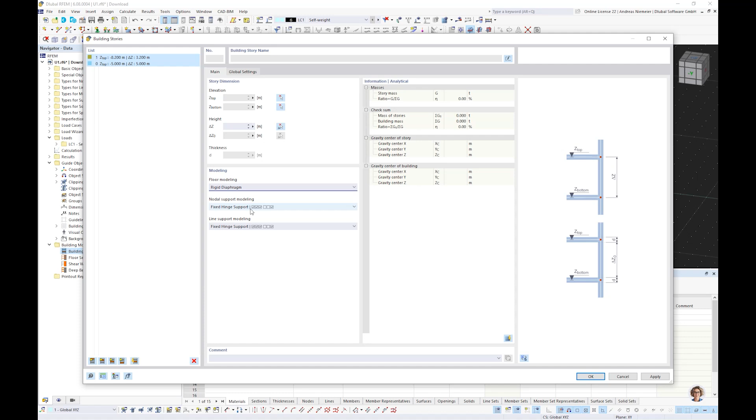Further I specify: program, please consider the floors as rigid diaphragm in the 3D structure, and additionally the slabs or ceilings from the first and second story should be supported on hinged supports - of course you can select something else. Now I confirm, and no blinking or highlighting infos will appear, only you will see in the middle a dimension showing the height of the stories, not more and not less.

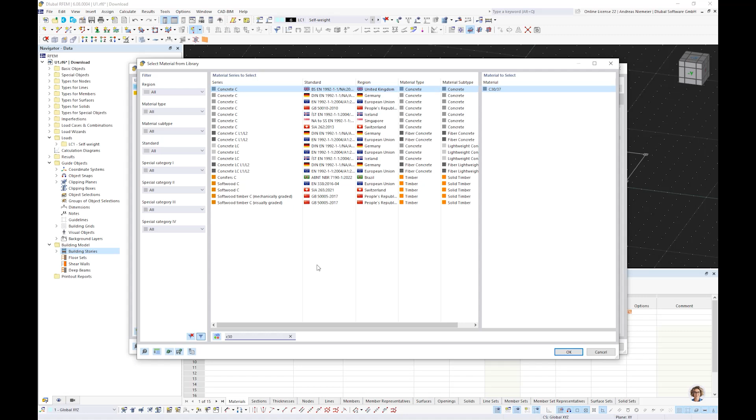And now we can start modeling the building. For this I use, for example, the column command. Let's say we have columns here. We know the column should be a concrete rectangle, so I go into my library, select a square rectangle, maybe with a size of 300, and a concrete like C30. Let's select it here - C30 - and you see the program directly finds the suitable concrete to this keyword, and we confirm this.

It's going gray, and now we can start modeling. Let's say the exotic part is that the program asks me with a small dialogue: do you want to have this column in story 1, or 0, or in both? In my case now both, and now I pick it. Oh, I can't find the snap point - it's like in a CAD program, you can activate it here. And now let's go to the other places, and maybe if it's easier we can use a top view and jump around this.

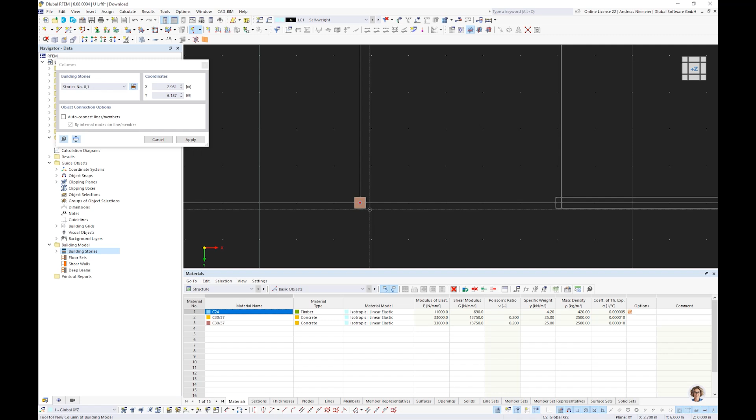Of course you can also copy if it fits. We have no rules for this. It's still like RFEM where you can do everything at every stage, but now have a look. If we change to, let's say, isometric view, maybe make this box here.

You see you have the columns here, with the right length, 5 meters, 3.2. The same for, let's say, the ceilings. We can take a polygon floor plate, and we specify a thickness of C30 and 22 centimeters, and go.

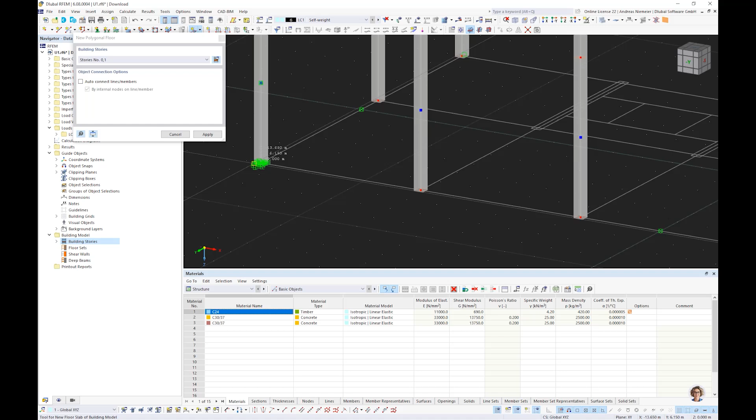Now let's say we pick the corners of the building for us, and maybe we realize we need it only for the first one and not for the others, so we can change it during picking, because the program will realize it. And now you see we have this ceiling inside, also with the opening for the stairway.

If you want to do the same for the top, we open the command again and say now maybe the upper story, and we pick the points here, and maybe this corner point here, and right click. Now we have the upper story.

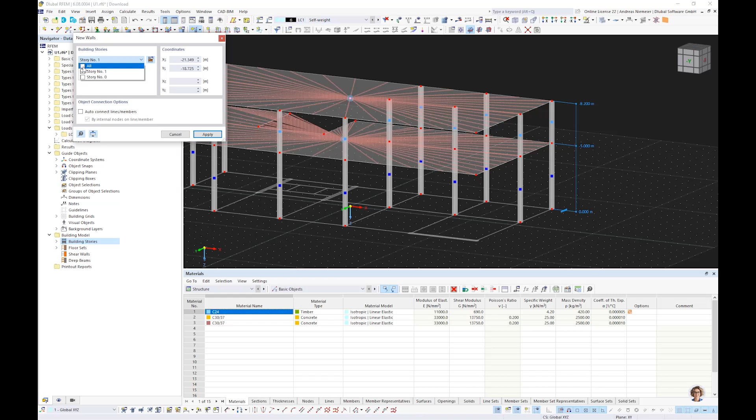And now we see, oh, we have also walls here. No problem. There is also a wall command where you can select a different thickness, maybe 24 centimeters, but for concrete. And if you pick it, you can say for which stories. I say for all. And now we define the wall should run from here to here, and the same for here to here, and maybe the last one from here to here. So easy it is to define a building with walls, ceilings, columns, and now it works like before.

We can apply maybe supports, so for example here also nodal supports, maybe here that we can grab all at once. So this it is, not more not less.

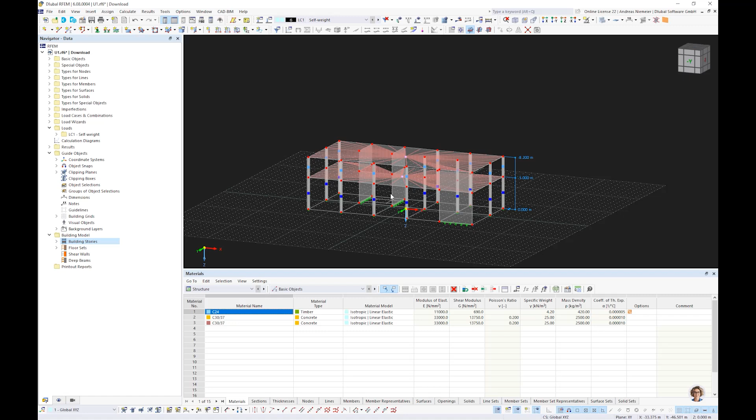And of course we can start calculation, and you see the program is dividing the calculation job of load case 1 into 3 parts. Why? This you will see now in the results. You see, maybe if I scale everything up, you see here we have 3 types of results: walls, floors, and both together. And this is now the way of thinking like a building.

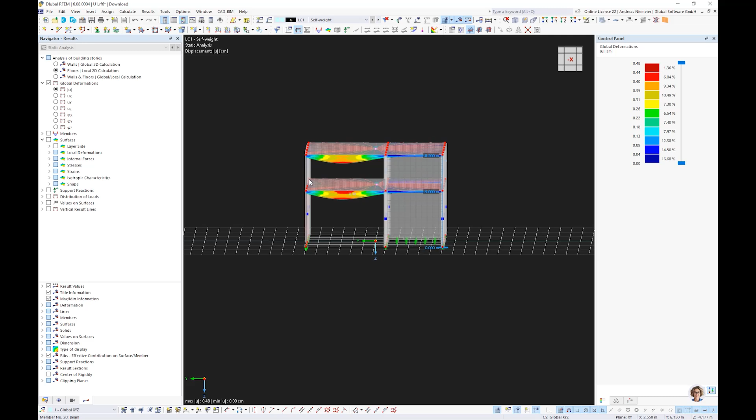Yeah, you have now, for example, here only floors. This means the program interprets the floors as a separate substructure. It calculates the ceiling with separate supports, separately. So I get for these elements only bending moments, but no membrane forces, because I assume these slabs work rigid in plane, that maybe the main structure is working, but this ceiling itself I calculate separately. And the support reactions from the floors I transfer to the walls, so I can calculate the core of the building. This means in this model we have 3 calculations: one for the first ceiling, second, and for the walls itself. So it's separated, and this ceiling is not hanging on the top, for example.

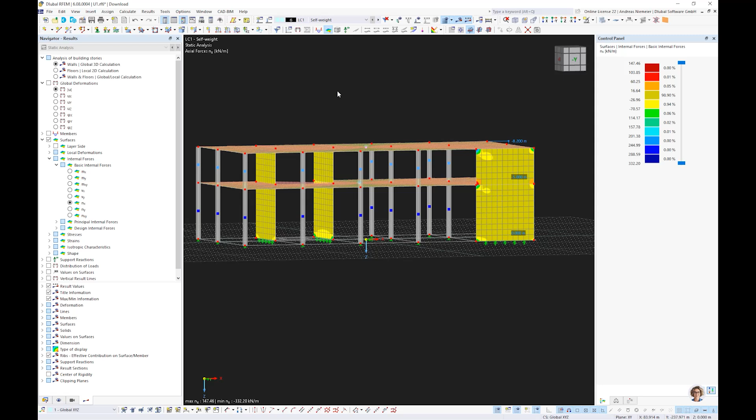So now let's say we extend this example, and I prepared something. So I close this, and I open a more exhausting example regarding what's called a building model.

Yeah, so here you will see the same building with more stories, so with different story heights, a bottom floor, a ground floor, some regular floors, and a roof floor. And you see also here, for example, the increasing normal axis gradient of columns, because I'm visualizing the wall result. Also the columns belong to it, and here we have our slab or ceiling, where you see these ceilings have deflection because of snow, but it acts separately.

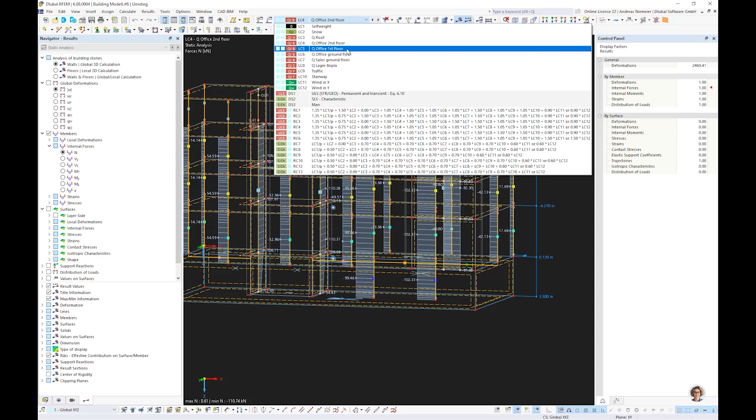And if you visualize maybe the normal axis force, you see the lower slab has no effect on the upper one. For example, if we show here a live load, you see the live load from this ceiling is going down but has no effect upwards. So with this type of calculation you can control the flow of forces.

Further, you see with these results, if we watch here, for example, again this self-weight result, you get it not only graphical, then you get also a table for this result. You see here in static analysis we have not only a way of thinking for members, surfaces, solids, but also for stories. The program gives you information about the mass per story, the center of mass for every story, and the center of rigidity for every story. So it calculates it as a separate task.

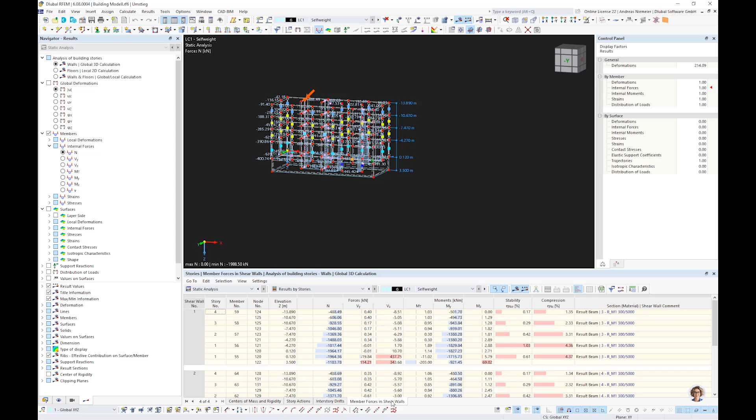Further, you get for every wall in this story, if you specify it, also forces. So how you can define a wall: here you see in your building model we have not only stories and floor sets, but also walls and deep beams. In this case I defined 3 walls. They have then a section like a beam, and one wall is this, and this one in front here.

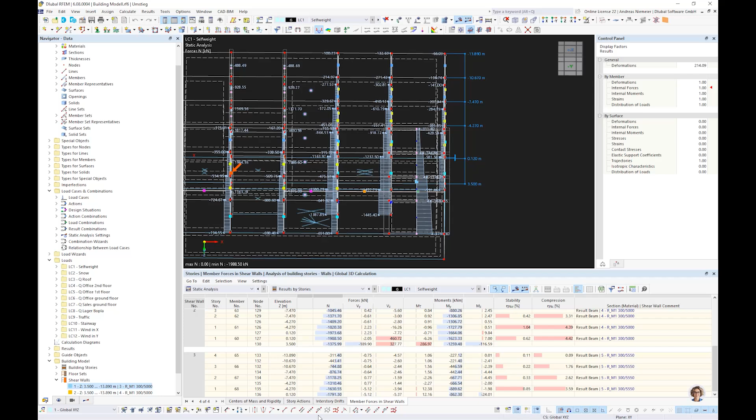If I define it as a wall, the program interprets it like a beam. All these forces get locked down in this table for every load case. You see the increasing normal force in load case self weight for wall 1, wall 2, wall 3.

You get story actions, and these are interesting if you take a look, for example, on wind. We have a wind load case in this horizontal direction. The building model allows you to interpret the building like a diagram, giving you the separate components per story. Maybe the wind load on the top story brings 20.4, the next 30.2, 30.2, because we have similar height. Everything is locked down for what happens over the height of a building, which helps you interpret the building simplified like this concept.

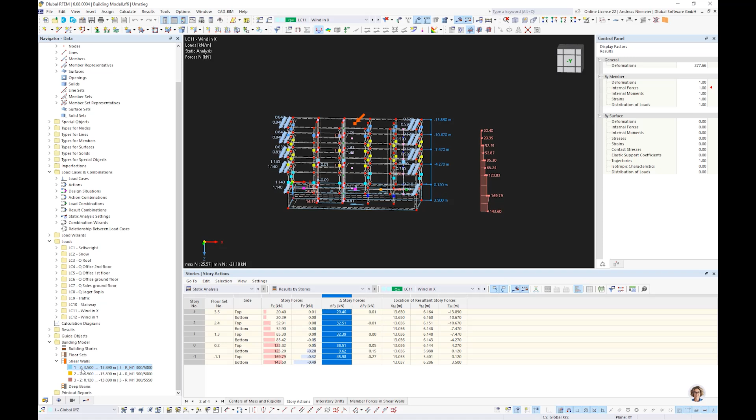If you have some stories in between that need the transfer or the reaction of deflection, or the stiffness of the floor set itself, you can control it here by defining if it's rigid, not rigid, or semi-rigid. All these options are available per floor set.

This brings me to the next point: what if you have a more complex building, not just a story-wise building with ceiling, column, and so on? Then you have to take all calculation options and consider the stages in between. For stages we created a further add-on, but to explain how this works I prepared a model called construction stages, which should give you an idea of which type of issues or challenges could happen when designing buildings.

Here I have a simple building. You have columns restrained on the bottom, a beam supported hinged on the columns, and a roof from timber that is also supported hinged here.

If you watch the forces from self-weight, at first everything looks nice. You get here in the columns the increasing normal axis diagram, clear. But what is a little unclear is why I get such big compression forces in the timber beams according to self-weight, even though there is no load on it.

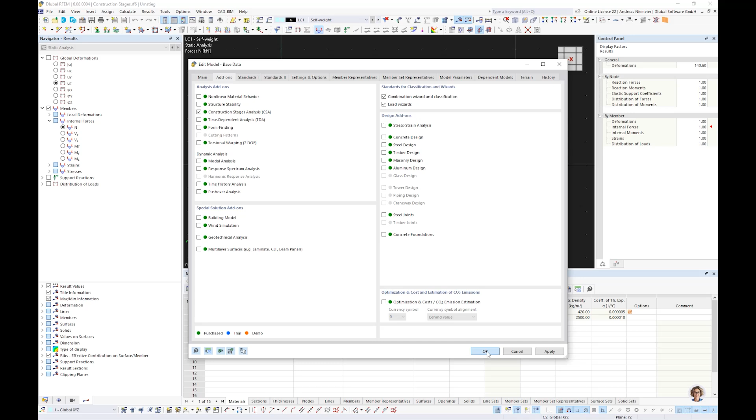This is exactly the point where you say, I cannot model everything in 3D. I have to take care of what happens first and what happens afterwards. For this we implemented stages. Such an option existed also in the old generation, but it was really restricted, only according to third order large deformation analysis. Now it's opened, completely worked into the program, and available for all calculation theories.

How does it work? First maybe we make a stage, let's say the column stage. In the column stage we have members and nodal supports. The members is clear, these two. Supports also clear, these two.

Then we have a next stage, let's say the girder. Here let's assign it, it's really easy, it's like bricklaying. The next is the roof.

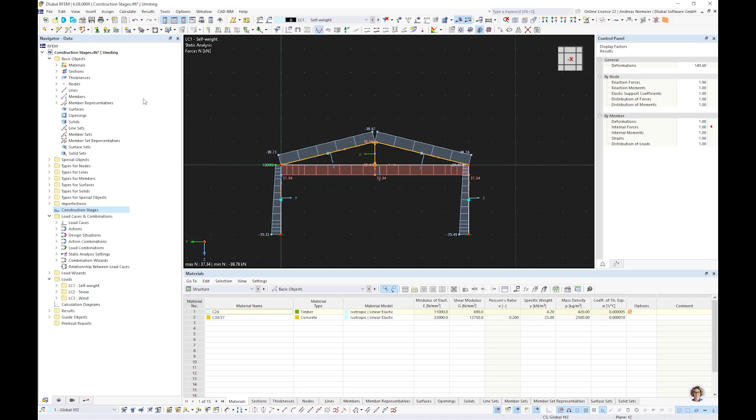I selected these three stages with these elements. You can visualize it also: if you say column here, maybe I hide what is not active, girder, roof. Now the program needs to know which loads are acting on it.

So let's say clear: I want to design the column stage, girder stage, roof stage, and I expect that in stage 1 only self-weight and wind are acting on the columns. In the girder stage, wind is acting additionally, and in the roof stage, snow and wind are acting.

What happens now is the program creates a load combination for every stage. So you have a separate column for stage 1, stage 2. In stage 1 we get only self-weight and wind. For stage 2 we get self-weight and wind. For stage 3 we get self-weight, wind, and snow. That's how easy it is.

So when I design this design situation, the program calculates it for every stage, and it's clear it cannot calculate all of them at the same time, because the stages themselves are always the basis for the next one.

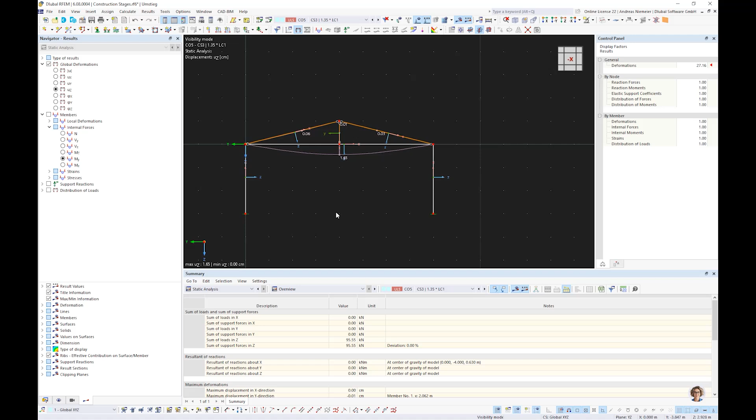What this means is: if I calculate stage 1 only for the column, let's say with wind, then they are loaded and will be deflected. Then we place the beam on it, it will be loaded, and finally get also the deflection. Here you see the pre-camber, and on this deformed state we finally define construction stage 3, the roof. And now in this type of analysis, we have no tension force on it.

And this is what I want to show you. RFEM 6 gives you now the option to work like this. You can really define how you assemble it on your building site. In comparison to RFEM 5, you now have the choice to use geometrical linear analysis, second order, or third order analysis. It's even possible to say the stages themselves should be analyzed according to third order, and the individual load situations on these stages should be calculated linear. It's also possible, and then the program changes the basis of this.

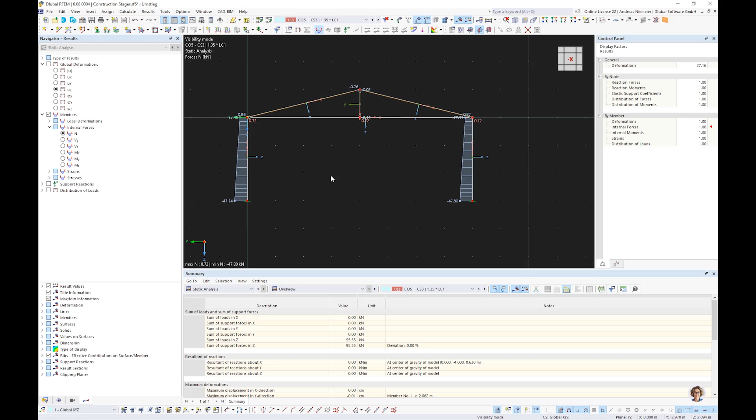So, further, this was the example, think like a building and interpret it. If we come now to the next point, this means efficient usage of couplings, because we coupled here, if we take a look at the stages, construction stage with load. But there are more couplings possible, and RFEM 6, the new generation, is living from it. This means I close this example and open a new example.

What this means is I want to take over reactions. For this, let's say, where is this ceiling about first floor, and the second model, ceiling about ground floor. To use the space of the monitor, let's say I remove the spreadsheet and organize it in these two views. So we have here first floor, here we have ground floor. What is the difference? Let's go through the model.

If we take a top view, you see we have line support here, so we simulate a wall. We have a load case self weight, maybe without results, and we have a load here, a load here, and another here, and all will be combined. In this model, from top view, we have no wall below, so this is one big room. If you look at the load cases, we have self weight, one load for this room, and one load for this room.

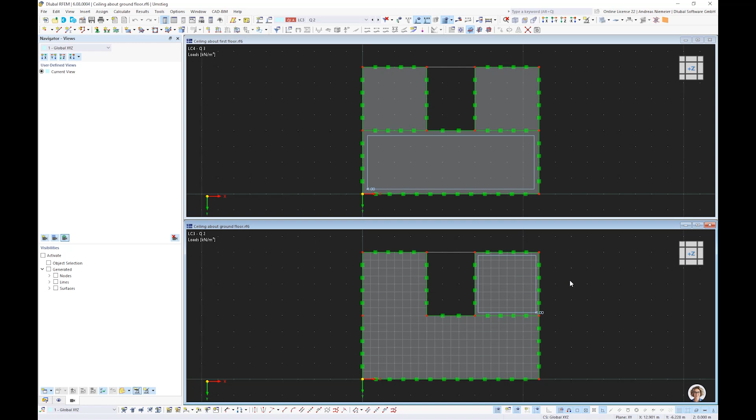Now the question appears: if I calculate this structure, I get, for every load case, support reactions. When I activate it, we get deflections and of course also reactions. Now we have to apply these reactions on this model here. For this, I have to think about how I want to bring them in.

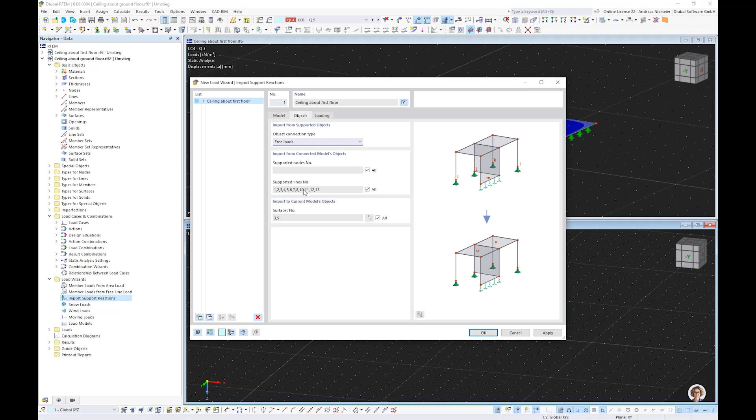And now you can use the wizard for taking over. We have here import support reaction. You can say I want to import it from ceiling about 1st floor, it's in the project from Dlubal Center. You decide you want to import support forces as object loads or as free loads from all supported nodes and lines, meaning these lines and nodes, and on surface 3 and 5, meaning these surfaces. In comparison to RFEM 5, we can use nodes and lines without exotic connections.

Further, you can define automatic transfer to load cases, which means load case 1, surface load should run into load case 1. The other 3 load cases should run into, manually, 4, 5, 6. So here you really can decide which load direction should be moved or transferred.

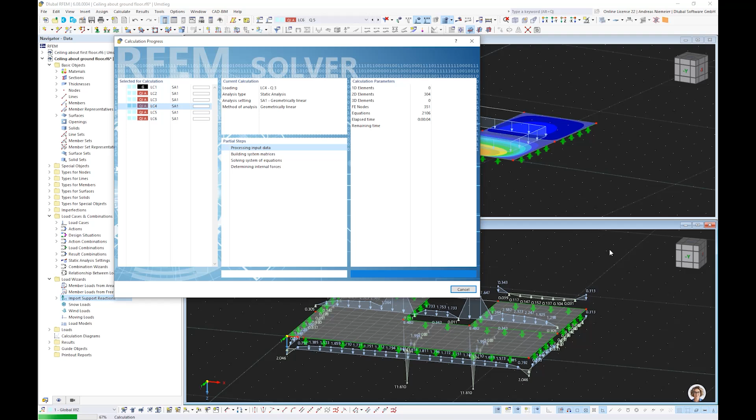You see now the program visualizes it with a question mark, and if I calculate it, the program will extract the reactions from the upper model, from this, and define it as load on this. Use connections efficiently, this is the point I want to show you. You don't have to write something, it's done automatically.

And what is really nice now, you see the surface weight clearly, it's a permanent weight, and also in this case where we have a wall on top but not below, you get a load here as free load. The regular load cases are not used as defined in the table, and here we have the loads from the separate load case, from this room and from this room. This is, let's say, a really efficient usage.

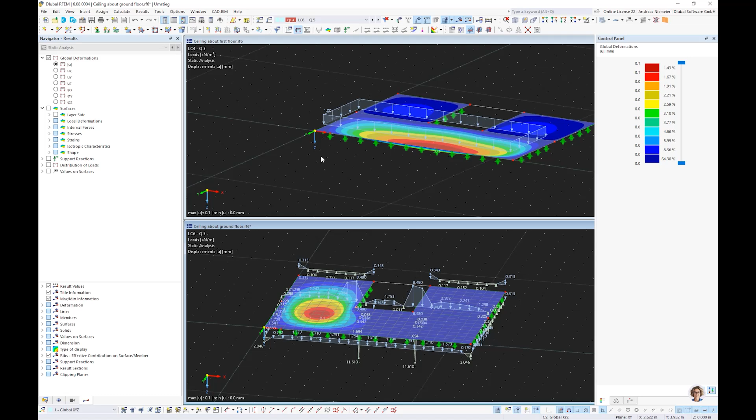And what is also really a difference to the old generation, if you have the situation, for example in permanent state, we have a load from the roof. So for example, I use a standard load with 1 here and here, and we also have a horizontal effect, maybe in X.

Let's use here 1, and let's use here -1, so we have some roof load effect. And you specify now in the lower model, in the wizard, to use for the permanent state not only the Z direction, but also the X component, and confirm it.

The program wants to delete results. Yes, we have to save, clear.

Now when we recalculate, the program is using the data from the model above, also the horizontal stuff. So it calculates first the floor above, and then uses these results in the lower one. And you see now in load case 1 we have also this horizontal effect in the forces.

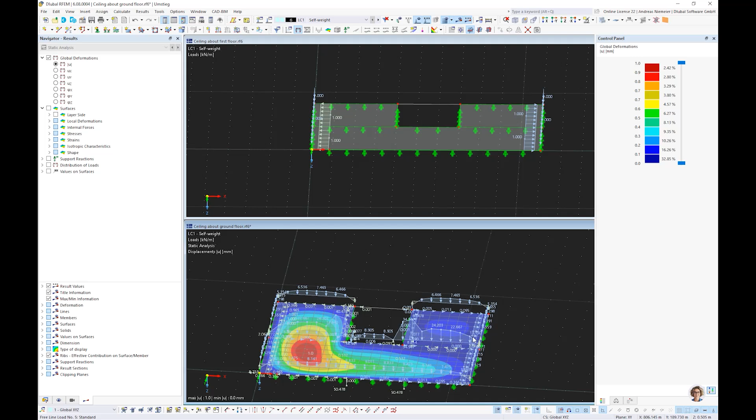So this could be quite efficient in your work, and if you want to freeze something, no problem, go here to disconnect, and disconnect dependent model. Then the program gives you, for this load case, loads that have no connection to something. So that's efficient usage of couplings. You can use update, but you can also break the update.

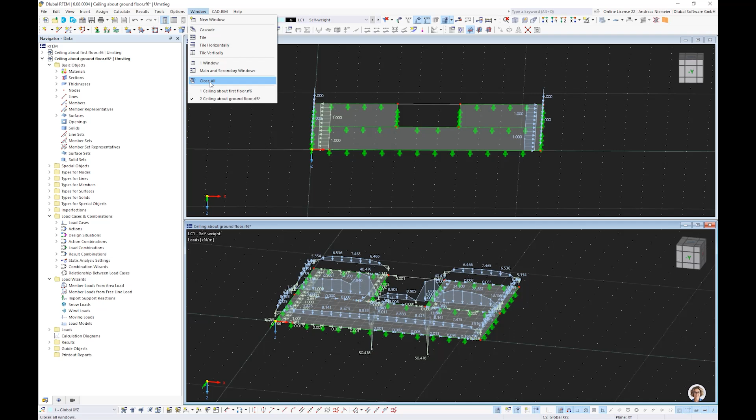Now let's come to the next coupling, a completely different topic, but it's also coupled. For this I close all and open a new scheme. Let's say you have to design a user-defined cross-section from aluminum. For this I open our cross-section modeler.

I call it UU1, for example. In comparison to our old generation, we had two programs, shape thin and shape massive. Now we have only one, and you can decide here massive or thin walled.

Let's start with the massive one and create a user-defined section from aluminum that is extruded. For this I open it and specify the material, which means I make a new row and write here maybe from label 60, 61, and use such a T6 material.

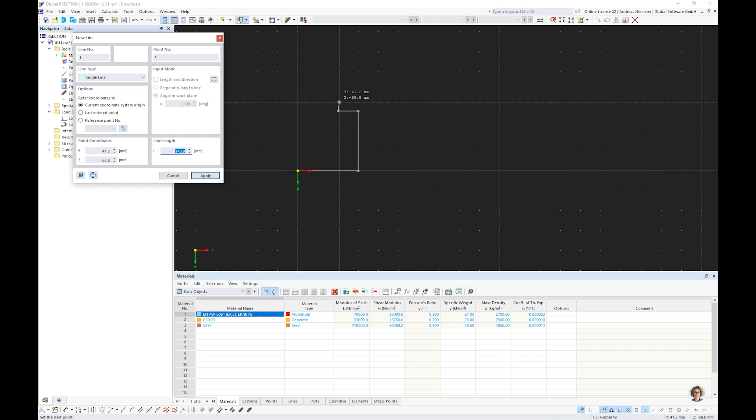And now we can start modeling this section, and of course you can do so many things, but I use these grid points now. So we have maybe here a line with 60, 60, 20, 20, some section like this. This is now a polyline. I can extrude it, so we have functions to extrude it.

Let's say we have a thickness of 3 millimeters, so we extrude 1.5 to the left and 1.5 to the right. The center line we can break, and these two lines we can select and break into single lines.

Now let's say the geometry is closed. I close it here, and because this is manufactured manually, I have here some roundings.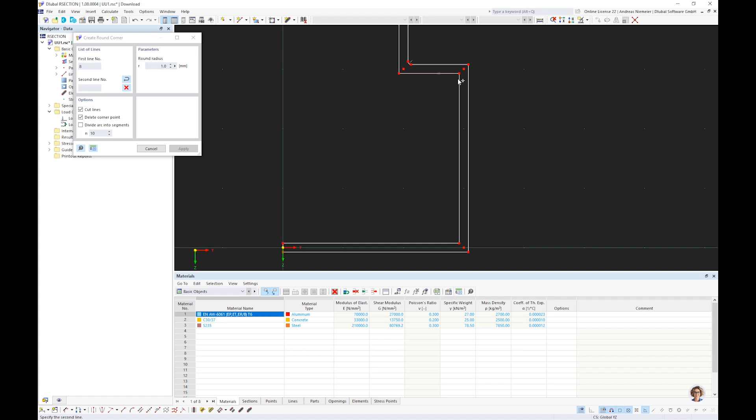I really want to show you these roundings, because this is always in connection, or in conflict, with thin walled sections, which would have a striped geometry. This striped geometry is always the break between massive and thin walled, and now, with our developer state, we reached a point where you can simulate both.

So this is, let's say, the first part, where this line geometry is from aluminum, we fill it with a material, and we calculate it and get section values. Quite easy. Now we say this section could be used in RFEM, but you can't design it, because the aluminum codes want to know the C to T stripes regarding buckling and shear.

And for this, it's no problem. In our section, you can extend it. You can say yes, this is thin walled, and additionally also aluminum stuff should be considered for the stripes.

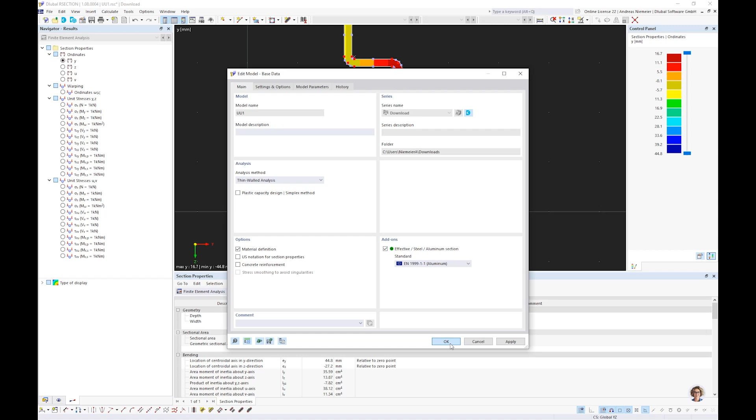Now let's insert these stripes. We can say we have here stripes with a thickness of 3 millimeters from this aluminum, and we insert it, and you see they are really rectangular and have here overstand. But this is no problem, because we use a mixed calculation of massive and thin wall sections — for the bending relevant part we use this part, and for the shear and buckling relevant parts we use these stripes. And you see the program will move these stripes intelligently according to these roundings.

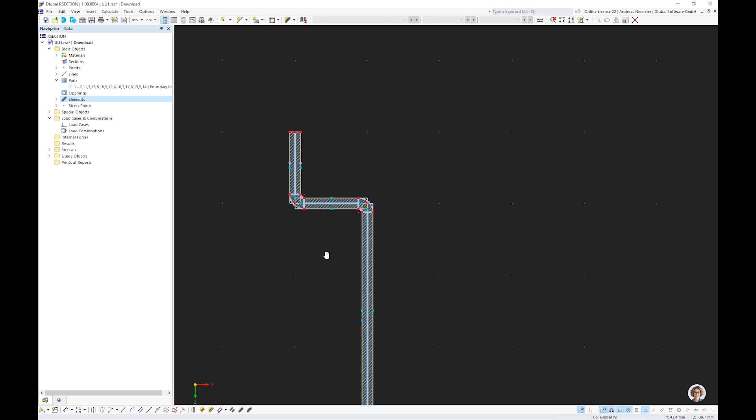So now when you calculate this, you get also section values, no problem, but then you can use it also for design, and this is the digital connection you can use efficiently.

So I store it, and now you jump into RFEM, and you can make an easy aluminum calculation, call it U7, and check here aluminum design. Let's define a new member, define here section, go to library, say I have a user defined section UU1, and insert it into your model.

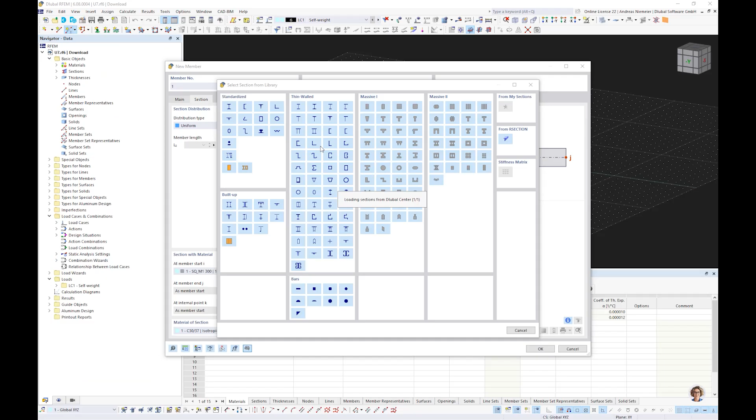The program is efficient, it takes directly the material you defined, it's hard coded, and now you can pick this member into your space. You see you have this geometry directly in your structure. For me at the moment it's irrelevant, we can support it.

Of course we can also load it, let's apply 2 kilonewton per meter, and now the concept of RFEM 6 is working. You only pick calculate all, and the program does the rest. So it's meshing, creating combinations, and doing the aluminum design.

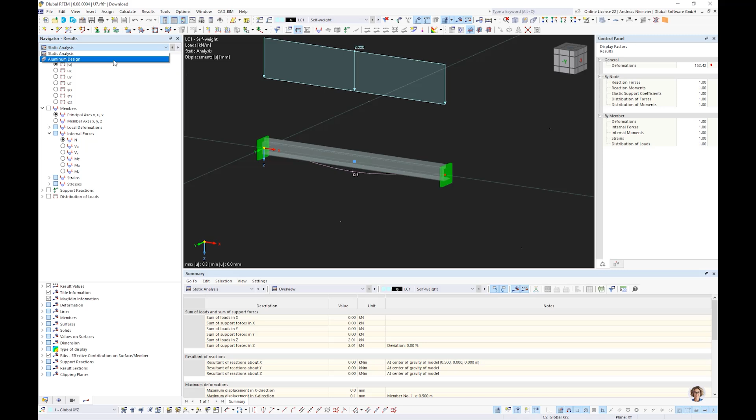And you see you get not only deflection, but also, let's say here, a deflection curve. This is pretty cool. But now I want to show you the next stage.

If you realize you made an error, or you have a change, so the cross section changes a little bit, double click the member, and you have here a section button. This means the program opens the section live inside RFEM in a special mode, and here you can say, I have a new stripe here because I forgot it, and you add it.

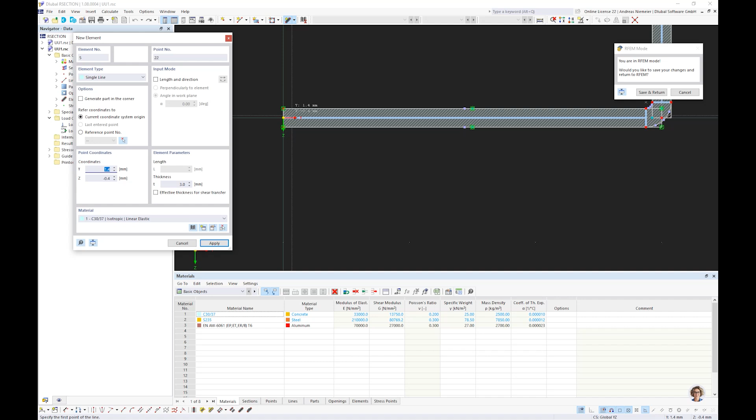Or maybe I redo it because it's not destroyed, the section again from here to here. Now of course I know what I made wrong - not from concrete, but from aluminum. Now the color fits.

Exactly. The program realizes it's the same material and merges this stuff so far, but these corners I don't like, because this is a little bit unnice. So let's say I change my view and optimize it.

So I say here I have a rounding of 1 for the inner curve, and the outer curve is maybe 4, and you see directly how these stripes are changing. And now you see, okay, this...

This surface now gets rewritten because it still has these lines in it, so we remove it and change it to this, and now everything is fine. This stuff could be deleted, this stuff could be deleted, and now it's ready.

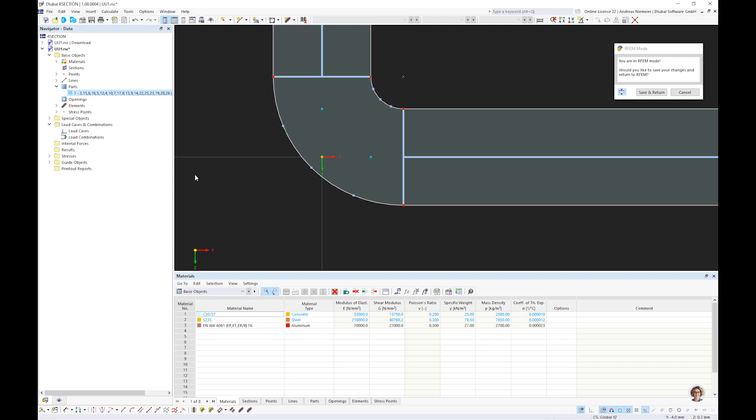We can save and return, and the program updates this section. Now we have this section in our program. I press calculate all, use connections efficiently, and you can directly design it. So we really invested a lot of work in this live change of sections.

You can do it for all types of sections, not only RSECTION sections but also standard sections, which should help you. And now you see you get directly a design course for the new section. I hide it.

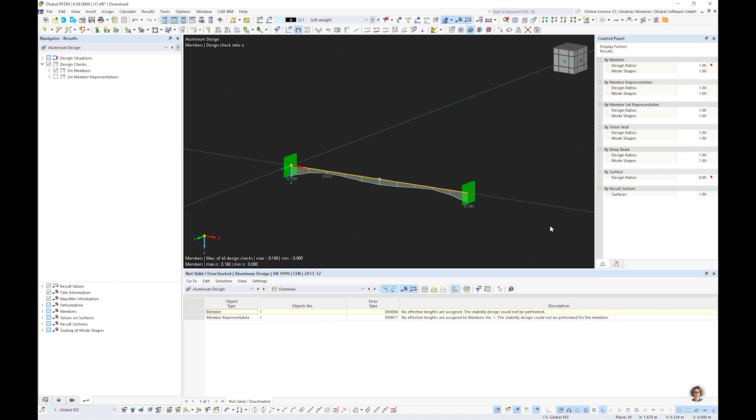So now this brings me to the next main point: what means substructures save time? Let me introduce you here. So I close this and open a new model. In this new model, I define at first a name, UU8, whatever, and I define here the multi-layer model. Why? You will see.

So at first, our task or imagination: you're a designer, you have to create a story from timber frameworks. Of course we can read in a DXF floor plan, but now let's make it pretty easy. When we are on top view, we can say our building is maybe typically 12 meters long, 9 meters wide. We describe it really easily with a few lines.

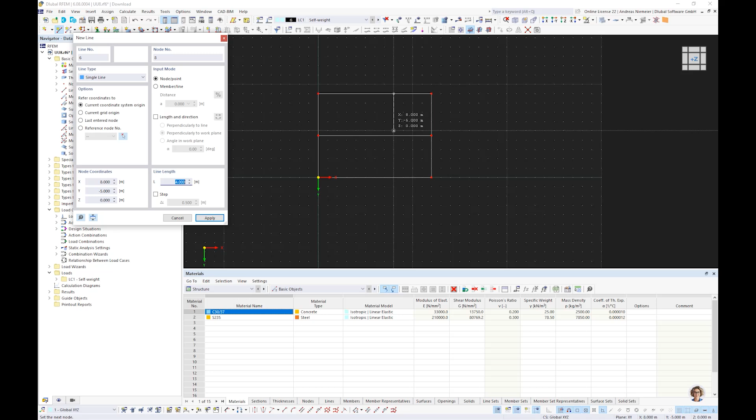Let's say 4 meters. So this is only my idea of an easy floor plan, not more, not less. And now we say, okay, this floor plan should be created with 3 meter high timber frame walls. How can you do this?

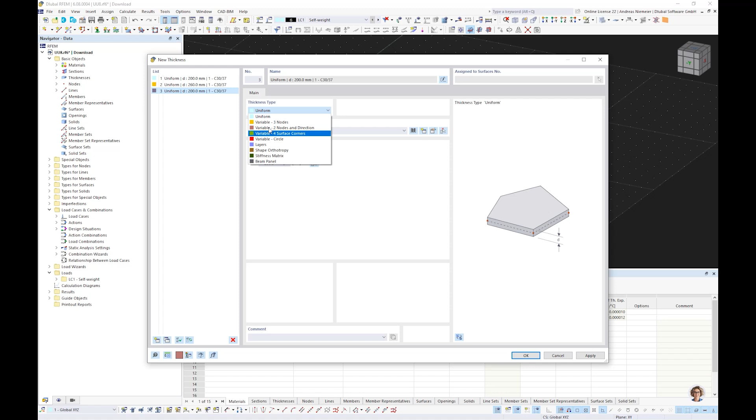In this case, we select lines, copy, and say please create a copy minus 3 meters in height, create between the original line and new line new surfaces, and the new surface should be a standard surface with, let's say, now the multi-layer add-on is coming in with a type beam panel.

And here you can specify sheeting. For example, we have sheeting from manufactured timber. So I select here one and define this as maybe orthotropic for surfaces, and the thickness is maybe 15 millimeters. And the same I use for the other sheeting on the other side, also 15 millimeters.

And for the framing members, so the members around, I specify maybe a new section, maybe here a section from timber, new material, maybe a C24.

The sizes are maybe 6 centimeters to 20 centimeters, so I have some space for insulation. And we can select this section for all framing members.

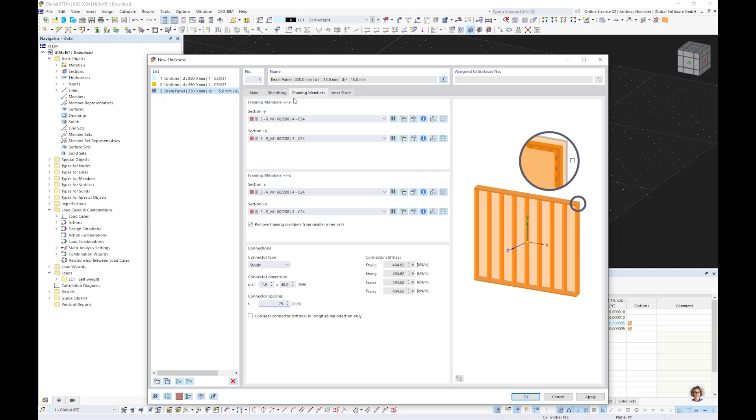Now we have to specify the connection of the framing members to the sheeting. So I use staples with 1.5 by 40, with a distance of 75 millimeters, and for the inner studs I use the same section with a spacing of 625 millimeters, which is the width of the panels. Here we also use staples with 1.5 by 40, at 75. From this the program calculates the spring, how it's connected.

So now we have defined the thickness, and if we copy the line one story above, we get brown surfaces. Looks really nice so far.

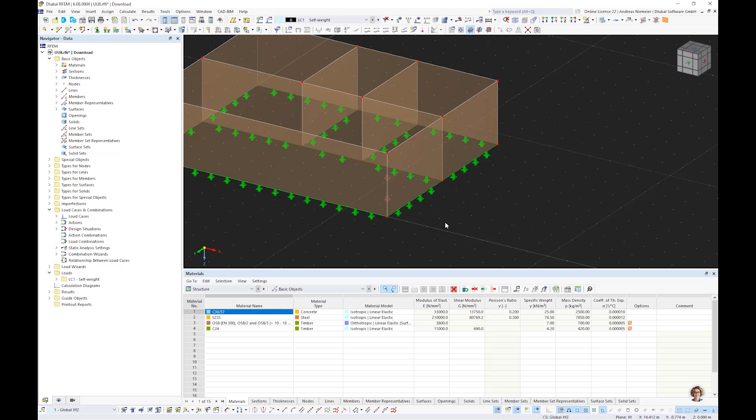And now let's say we can support it - maybe not this support. Because I'm interested what happens, I press on calculate. You see, the program is meshing, it needs some time. Load case 1 is calculated, and you get nothing.

Strange. Now the idea of substructures: of course you get support forces here, but where does the rest go? These surfaces give us no result. Why? Because behind these surfaces we have substructures - beams with surfaces, with springs. So there's a really complex model behind, and we defined it only via surface.

And you can calculate it. If you watch the forces, these are the normal axial force in the member, how it's increasing. Of course you have to take care more about loading, but you see you get a calculatable model with this substructure idea, and you don't have to model it by hand.

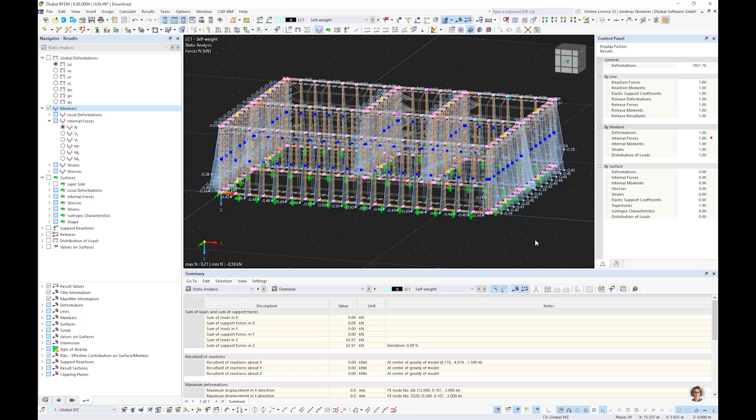We only copied surfaces. And now one step more - imagine you have to define windows, because it's really dark without windows. So let's create a window in front here. Let's say we have a window here, and also one here. What happens? At first, nothing.

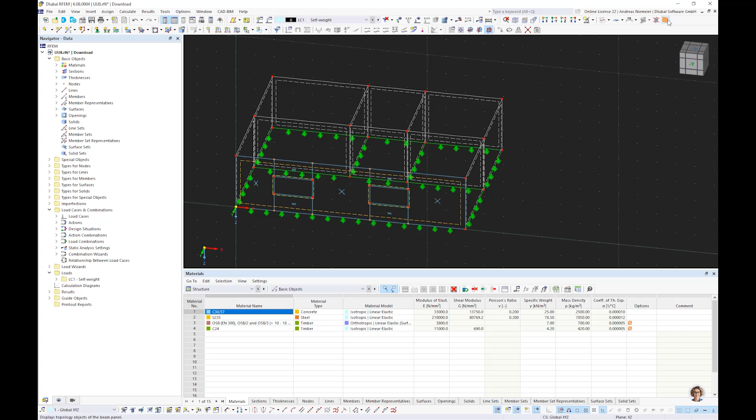But if I define here a cascading distribution, how to say, create surface cells around the opening, if I create lines here, the program is able to make a cascadic orientation or selection of the surface parts. And if I do this, the program is able to consider windows with a beam above and below, and also take care of the right distance of the vertical members. So it can really be a time saver - you only define a few surfaces with a specific thickness type. So this is one story of substructures.

The second story, also important for me, is the mentioning of the load transfer surface. For this I prepared a model, so I close it - this was an infinite wish in RFEM 5 generation. People ask us in support always: hey, do you have an element with no effect for statics or structure calculation, but that can transfer loads? And we gave tips and hints to modify the stiffness matrix and so on.

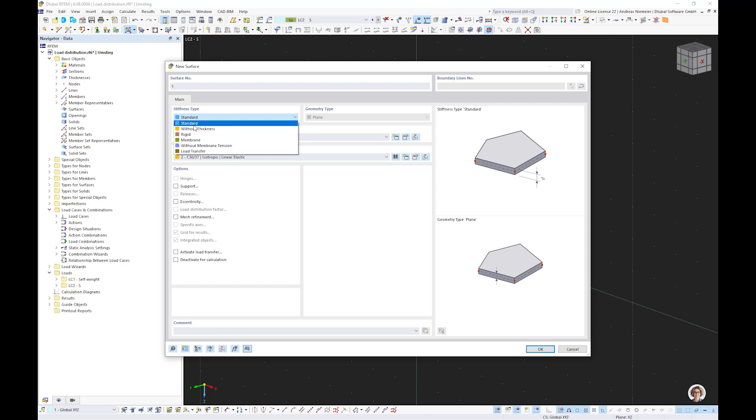Now we have it. So if you have a typical structure and you have to load it by snow, why not - make a load case, of course we need one, so call it snow. Give it a type, but this is maybe not the feature. The feature is that you have a surface, maybe by boundary lines, with a specific load transfer type. Now you don't have to define thickness or material, because it's not needed - it has no structural effects. Now we can pick it, pick the boundary lines to be concentrated, of course.

And now we have the surface inside. You see it in rendering, and now of course you can apply maybe a projected snow load, in Z, standard size is 1, and apply it. If we calculate it, we get forces on the structure, although this surface has no effect.

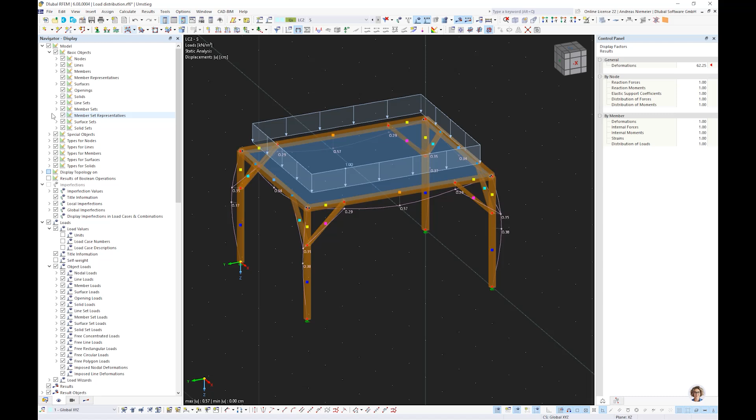So pretty cool - we have no surface forces, but you can watch what happens inside. You can say surfaces, say load from distribution, and you see the program is distributing the load on the surface as a homogeneous constant load around. If you say it should act only in one direction, go into properties and say only in Y, for example.

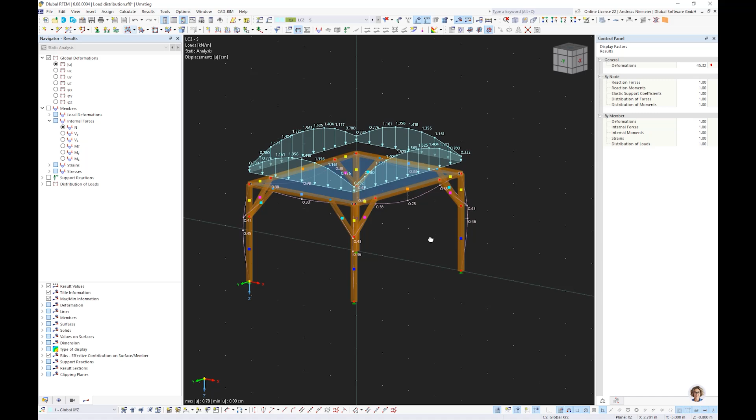And if you check which function was used here, you see isotropic finite element analysis. The question appears, what is this? It's a substructure. This means if I calculate this, the program has a load model below, meaning it takes out this surface in a separate model, hinge loaded and hinge supported, calculates it, and takes the reactions as loads for this structure. This gives you a real picture of load distribution from these surfaces. And this is cool because this surface has no effect on calculation, so you can really control how forces are flowing, and you can use it not only for planes but also for curved surfaces.

So I want to give you an idea how this is working. For example, we have here a curved roof.

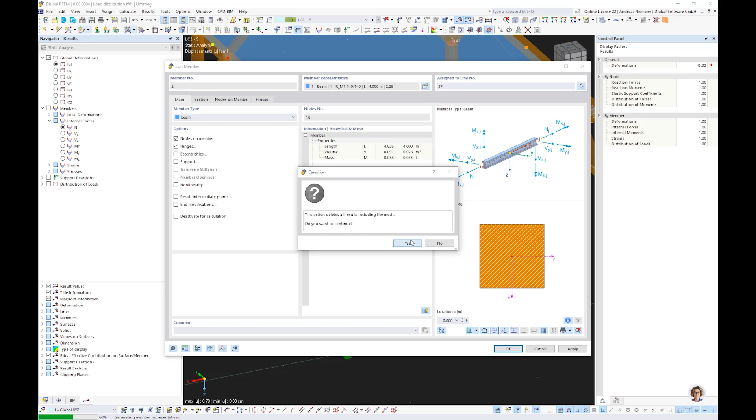So the beam is running in the right direction, or maybe vice versa with orientation. Now we say this beam is connected to this line, and the structure is changing. Maybe first we copy, it's easier. Now we can say this beam is connected to this, apply, and this beam is connected to this, apply. And this surface is not plane, then maybe quadrangle, and have this line included.

And now we have a curved surface, and if we calculate snow load again for this curved structure, it makes no difference. The program takes out this curved surface, calculates distribution around, and uses the reactions as loads on this timber structure. It's only your game to make it more complex. Imagine you have to do this by hand. How you use substructures saves time if you have such cases.

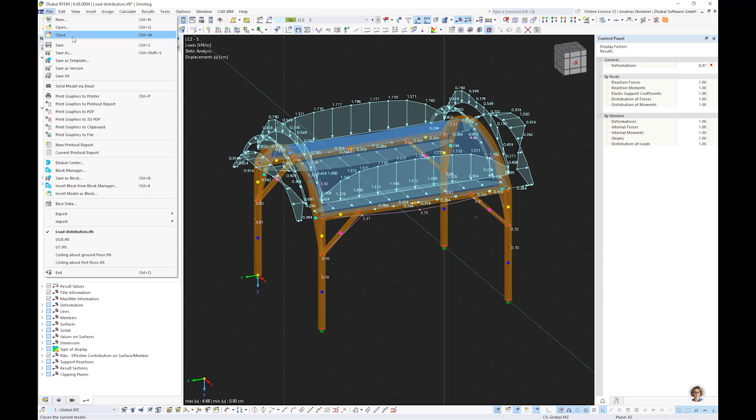So now I come to the next point: simply grasp reality. Let's say this is always our task when we calculate, how we can grasp reality as close as possible, but as rough as possible. For this, we extended our new generation with a few tools. Maybe the most famous one is here. So I have here one.

Where is it? This is it. I don't find it... torsion. Member torsion, yes.

Here's a really easy structure. I think everybody from us at first would say, yes, I calculated this by hand. Simple beam, I-section, pinned, supported against torsion here, with a main load vertical and a smaller horizontal load. What happens if we calculate it?

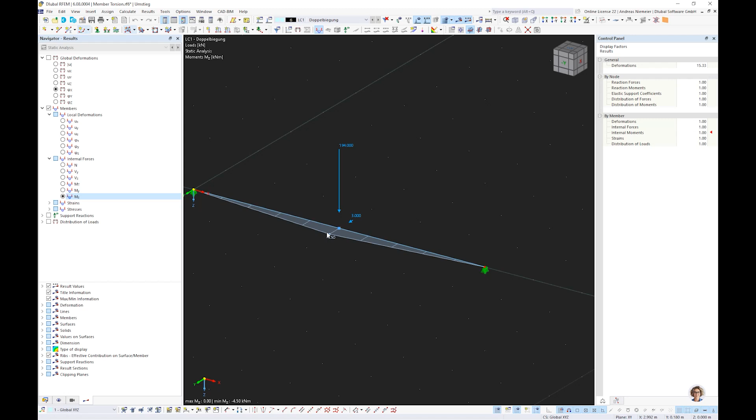If we calculate it, we get here a few forces. Of course, we get a deflection. Let's say we have a vertical deflection of 1.9 centimeters. We have a horizontal deflection. We have a bending moment in this direction of 4.5. Take a look, this ends up in a stress, just so you have something in mind, an elastic stress of 280 Newton per square millimeter.

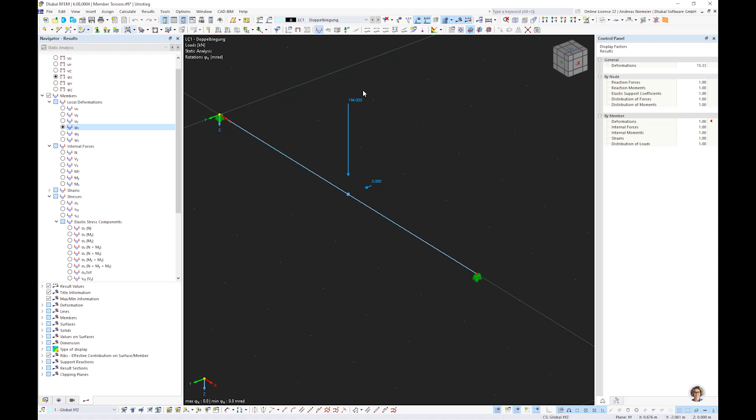And what is also interesting, imagine we have here a pinned support, a fork support. We have biaxial bending, and we expect, or I would expect, also torsion, but torsion is 0. Now my question: we get bending moments that seem real, deflection that seems real, but the torsion is questionable. Why do we have no torsion? Yes, maybe we have to activate a few more checks or options in the static analysis.

So let's say calculate according to third order. Third order large deformation analysis is always able to consider all effects. Could be, let's try, calculate. So you see meshing, static analysis is running. It seems we have some effects, and you see also the solver has some vibration oscillations in it. Let's take a closer look at the results.

And wow, we have now a rotation of 845 millirad. Seems to be pretty big. Also, if you take a look, bending moment MY is clear, but now we have 220 kilonewton meter in horizontal direction, up from 4.5 kilonewton meter. Sounds a little bit strange to me. And even the stress is 1616 Newton per square millimeter. Wow. So it seems to me like a bug.

But you always have to grasp reality. Is the program able to consider this effect here? We have an open cross section with biaxial bending, which should induce some torsion. And the challenge is the program only knows 6 degrees of freedom. It has no warping stiffness in it, and without considering this warping stiffness, you are not really able to model such stuff with members.

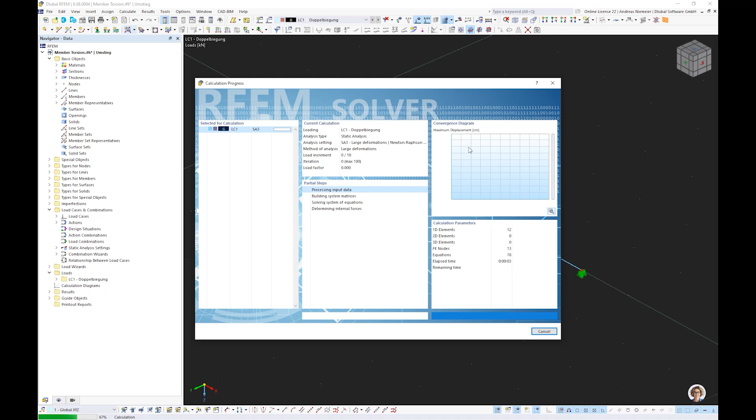You get results that fit a little bit more. Now we have a stress of 527, elastic stress. We have a torsion of 81 millirad, so much smaller. We have a bending moment MY the same as before, and horizontal 28, so much smaller. And we have also a warping deflection towards the end of the supports, and we have a primary torsion and a secondary torsion plus a warping moment on the structure. With consideration of the warping plus primary and secondary torsion, we are able to capture all effects that happen, and we are able to calculate as close to reality as possible.

So this could be connected to first, second, third order analysis. So this is what I wanted to show you, and you are able now to do it. You can use 7 degrees of freedom in a member structure connected to shells in RFEM. This is really new.

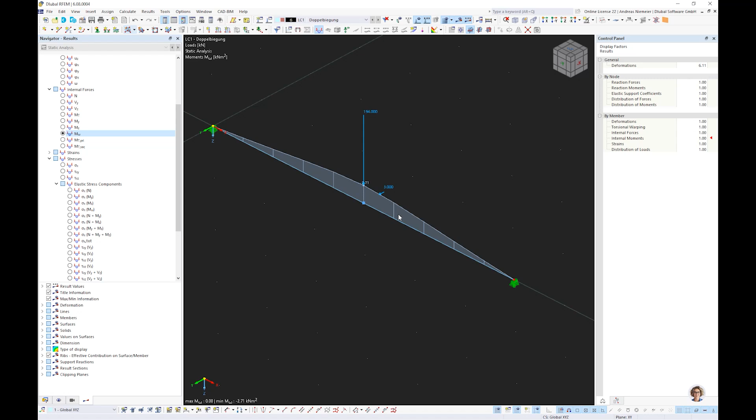Now I want to come to the next point regarding simply grasp reality. Let's say I open a new example, especially regarding connections. So I call it joints design, and my example is as easy as possible.

Yeah, we have beams, we have stresses. Let's take a look at the Mises stress. Maybe about 32 Newton per square millimeter on the beams. You see also here 0 point, and here again the restrainment on the column. So far, everything clear. What's also interesting, we have here in the middle 65, here 47. But we don't know how the force is transferred from this girder to the beam.

For this job, we have created an add-on called steel joints. If I use this, I'm able to say on these nodes here that I want to create a joint. I can select from nodes, from a template now. Let's make it different.

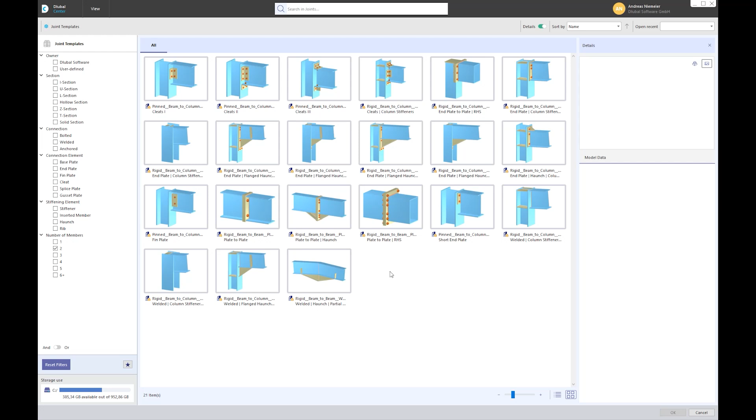Right click. Now it's working. I have a really big library of connections, and you can also create user-defined ones, but here it gives you a first idea. For example, here we select this example and say, please assign this connection to these frame joints.

Of course, the program is doing it. It thinks about why, because you have to adapt this template to the new section sizes. Now we confirm it and say, yeah, looks good. This looks a little bit strange though, so I don't like it. I modify it. I grasp reality.

I say I want to have here a cap plate on beam 1, and then I think I like it more like this.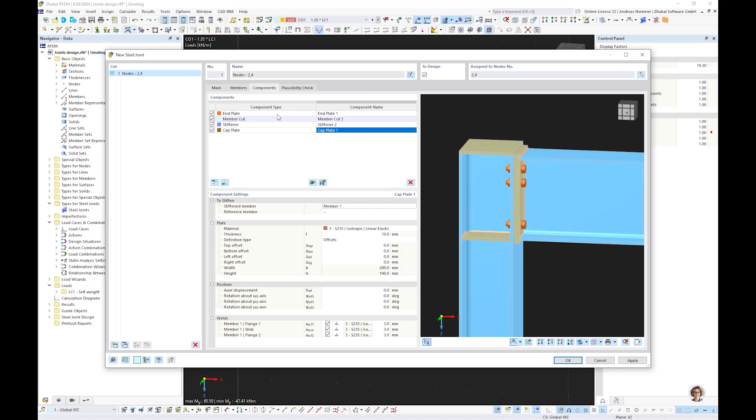Now we grasp reality, we can specify weld sizes, everything, but here we can also say we want to do ultimate limit design, but also stiffness analysis. We say, please make an interaction with the main structure, calculate initial stiffness and generate hinges in the main global model. Doing this, I have to tell the program, please do it for member 1 or 2. I say, please for this, for member 2.

Now we can start calculation. Calculate all. Of course, I know this takes a while, but in comparison to RFEM5, you now have a lot more options. You can define the connection like it really is.

Do we have a cap plate or a stiffener? Do we have different bolt distances? Do we have weld lines? Do we have on every element a weld line? Is it bolted? Is it welded? It's your game. You can decide it.

Additionally, this technology models behind it a shell model with nonlinear material law and checks in the end the strengths. This allows you to apply normal axial force, shear force in Y and Z direction, torsion moment, My and Mz bending moment. So you can apply all forces. It's independent, it's allowed, and we use this with this concept.

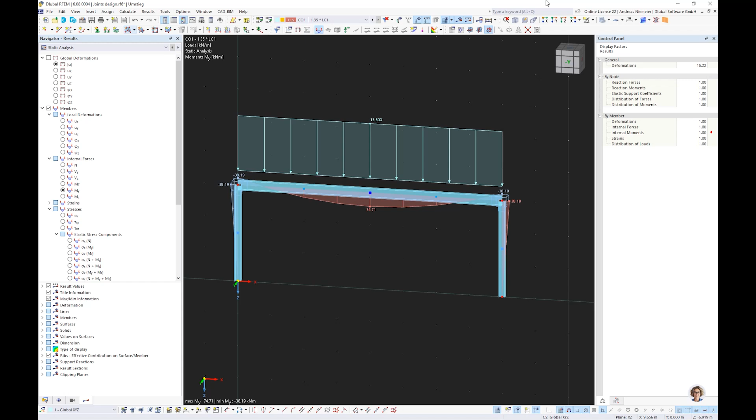And now you see what happens. We get into the joints design. Let's open tables, go to the joints design. You get a utilization. You get maybe the design check written directly here for all that is done.

You get a stress and strain view of the connection for every element separately. You can say, show me plastic strain, show me equivalent Mises stress. And finally, you get also hinges on the end of the members. So you have a type for member hinges where the program writes you the diagram, the reaction or answer diagram of the connection to the model from the stiffness analysis.

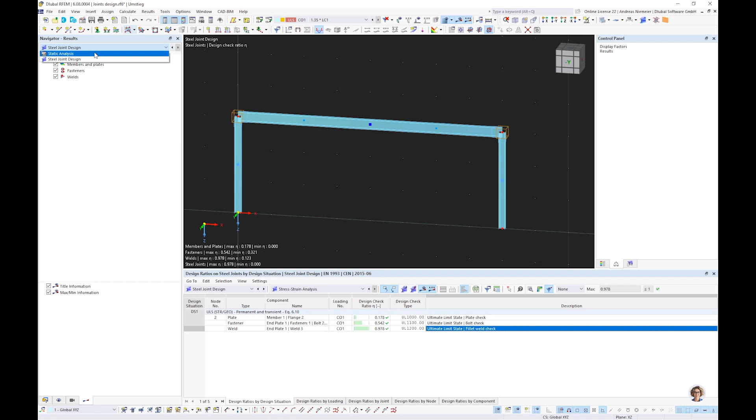And if you watch now the result, if you go here to static analysis, you see before we had here 65, now we have 74, and here we have 38. So this part is increased and this is decreased. So you can grasp reality now, interactively.

This brings me now to the last point of my part today, which means evaluate results in a targeted manner. Still a pompous title, of course, but I want to show you the work our developers did for you, so that you have an easy game in checking models. For this I prepared a structure. Where is it? Something with diagram. It should be here.

Here's the calculation diagram. Let's take a look first at the model, so you see what we are doing.

This is a simple beam with a transversal load. The beam is modeled from shells. The web has a thickness of 6.5 millimeters, the flanges have a thickness of 10 millimeters. The ends are supported with

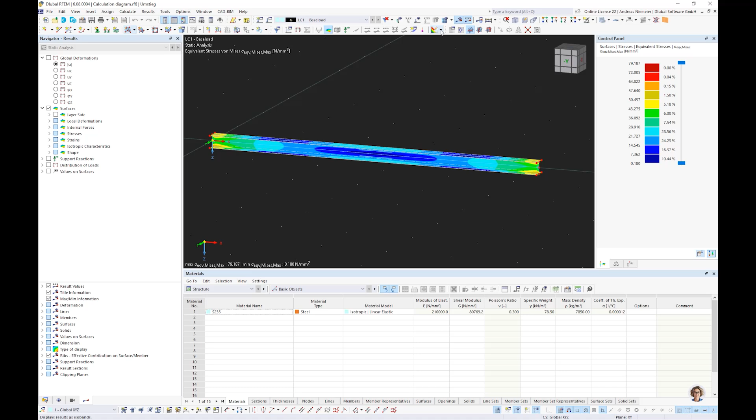Now let's say I want to give you a picture of what we want to do. Let's say I want to try to find out the carrying level of this beam - how much load we can apply. Let's calculate up to the plastic resistance.

For this I activate in the add-ons the nonlinear material behavior plus structure stability. Why nonlinear materials? Because I have to define the material steel to be not linear isotropic, but nonlinear elastic for surfaces.

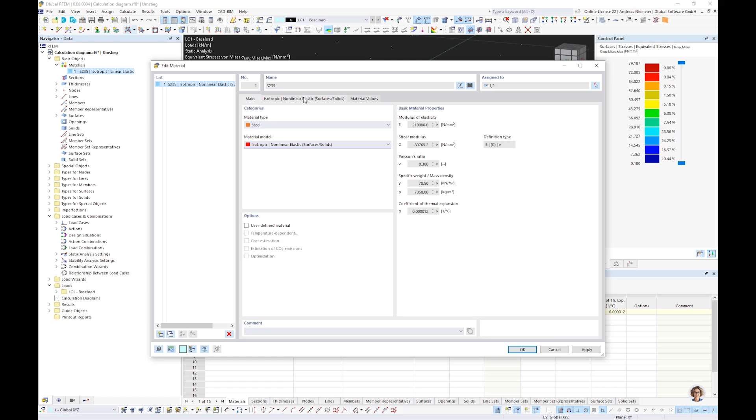What does this mean? You can select here different diagram types. I take the easiest one - elastic, and then the nonlinear elastic diagram, first with standard Young's modulus and then with a hardening modulus, yielding at 235 Newton per square millimeter in the Mises format.

What happens if I confirm this setting? Of course, results will be deleted. I can calculate again. And we get results - let's say the same, because we changed nothing on the load and it's still elastic.

So now let's try to get into the nonlinear elastic part to get some yielding effect. For this I take this base load and activate stability analysis here, and I don't want to calculate buckling or something like this now - I want to increase loading stepwise. For this I take the incremental method without eigenvalue, and define some parameters here.

My starting load factor - maybe we increase it always by factor 1. Refinement should be done with 5 in the last step, and we want to have maybe 10 increments. And because it makes no sense for me to calculate deflections from here to the moon, let's stop at 15 centimeters max.

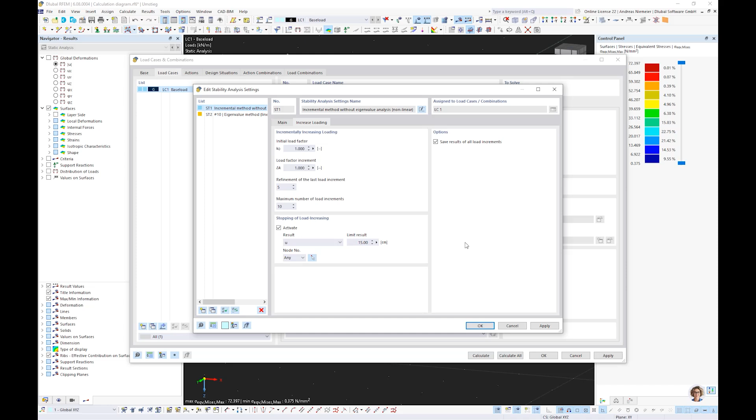And if we do this, the program has two steps: one for static analysis for the 10 kilonewton, of course, and the other is the load increasing step. You see now how we increase load stepwise. Now we come into this yielding effect.

Of course, we see only the diagram now, not more, not less, so we cannot decide what happens. But later we have to look into this result, and because we store every result separately, we have the chance to do that. Of course, such a function also works in RFEM 5, but now we created something that makes this easier for you.

Now slowly you see we have an increasing gradient. We're at 10 centimeters now, so this reaction is uninteresting for me. We come close to the 15, and you will see what happens when the 15 appears - so you have full control.

Now he stops and tries a second look to see if it works. So he tries again to load it in the last increment. The load factor is already reached so far. You can watch it during calculation, and now I think he will learn it makes no sense and stops calculation.

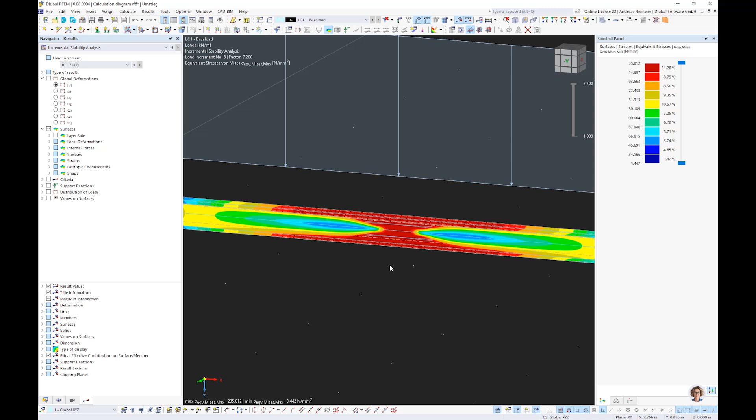And now we get a really interesting picture. Red in the middle, red on the right and left side - seems like a plastic bending moment. Plastic load distribution - the same here.

What is also new? You have here a scaling factor. You can say this is load factor 7.2, this is load factor 1, what we saw before. Maybe you can change directly here in between.

Further, you have the same box of this factor here on this result part. You can watch all results. The result we're just seeing is the von Mises stress, so we have, let's say, the stress.

235 here in the limit what we defined for yielding. What I like more is the criteria, because then I'm independent from the defined limit stress, so I have maybe yielding defined with factor 1.

If you want to analyze it over the length of the model, how can you do it? In this case we have these result cuts. We can say please cut, for example, only this surface, okay, and of course we have to solve from the mid to the other side. And we should visualize this result in the y direction.

Now you get the diagram here inside. Of course you can hide this and you see it much better, but what I like more is to select it and to jump into such a result window.

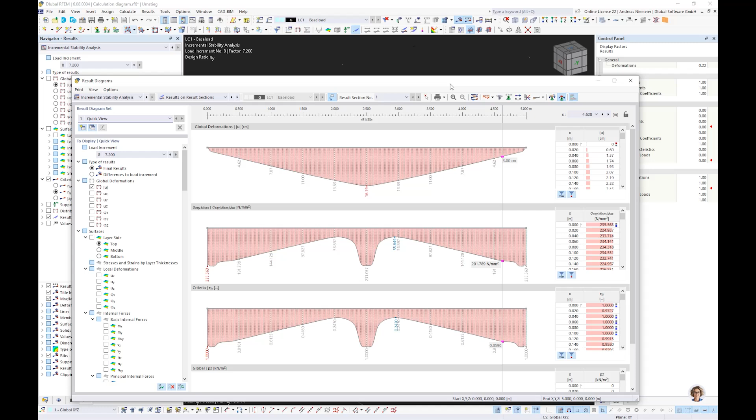And this is now non-modal programmed, what is new in comparison to RFEM 5, because you can work at the same time in RFEM itself if you have two monitors.

Now let's say we want to see deflection, maybe here U, and we want to see here criteria eta y. And you have again here also this increment bar where you say okay, this is load increment 1, then 2, no problem, 3, slowly we come here to the limit 1.

Now you see you have here yielding slowly, and now suddenly here it's reached, and in the middle it's starting, so you can analyze it quite easily.

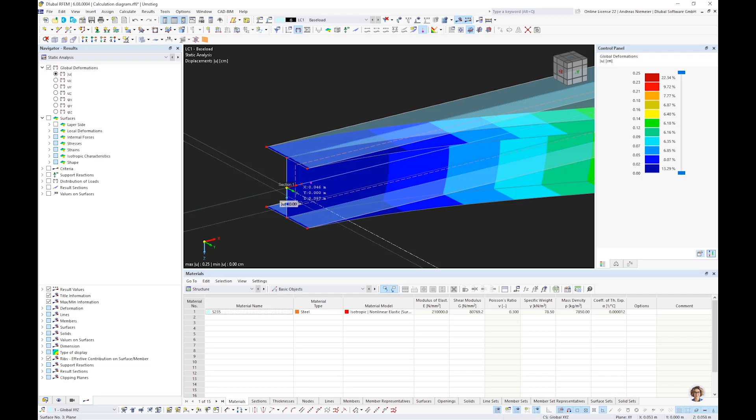And additional, what is also new now, is that you get here some - maybe you know it from RFEM5 - that you can drove above these surfaces and can pick something. I pick now one in begin, and I can pick one in the middle. But for me these points are quite randomly placed, so I don't like this.

But now in RFEM6 you have the option to say, hey, these result points are typed for surfaces. They're stored here in this list, where you can specify it, and you can say okay, the first one is maybe placed 1 centimeter inside the beam and in the middle, and the second is maybe in the middle of the beam, 2.5 meter, 0 and 0. So now the nodes or result points have the right place.

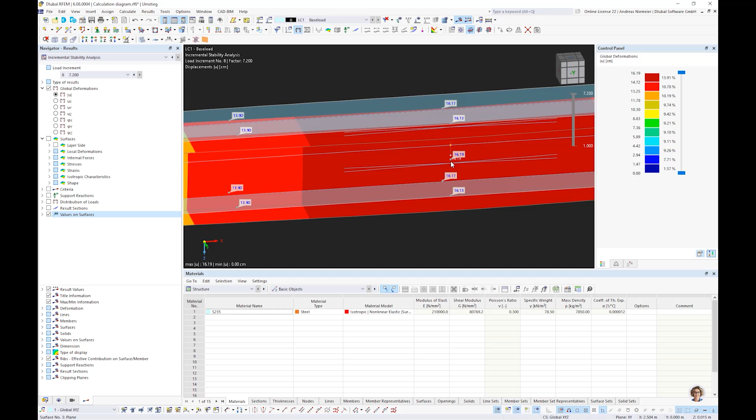If you show the result, maybe also here from the incremental analysis, you see maybe here values on surfaces, that you get here now a value. So far it's clear. You can have these values here, but behind this, why I mention it, is now something new, what was not possible in the old.

You have here a result diagram viewer, where you can say please document me, for example, in the incremental method for load case 1, in the horizontal axis the load factor, and in the vertical axis maybe the surface equivalent stress Mises, the max one for the web surface, and here not for any nodes, and really new for result points, maybe for the first one.

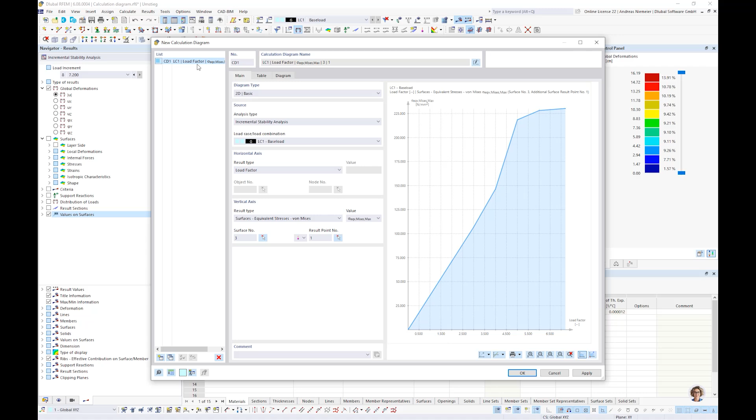And you see now, okay, how the load is now near the support elastically increased, and then you have this yielding effect. And if you copy this diagram and change it to the second point, you get it also, let's say, for the second diagram where it happens really later.

And now this was always a wish: can I overlay it like in an overhead projector? And now you can do it. You can make a new diagram with a type group. The program recognizes similar diagrams, and now you have both results in one scheme.

You see now the first one, the blue one, and then at any stage the second is also yielding, and quite fast. And of course the accuracy of this diagram depends on your steps, but this gives you options to analyze it in a targeted manner.

And this is what I wanted to show you. This brings me now to the end, and I hope I could show you with these few examples the differences to the old generation and how much work our team did to fulfill all these wishes that happened in the past, beside all general stuff.